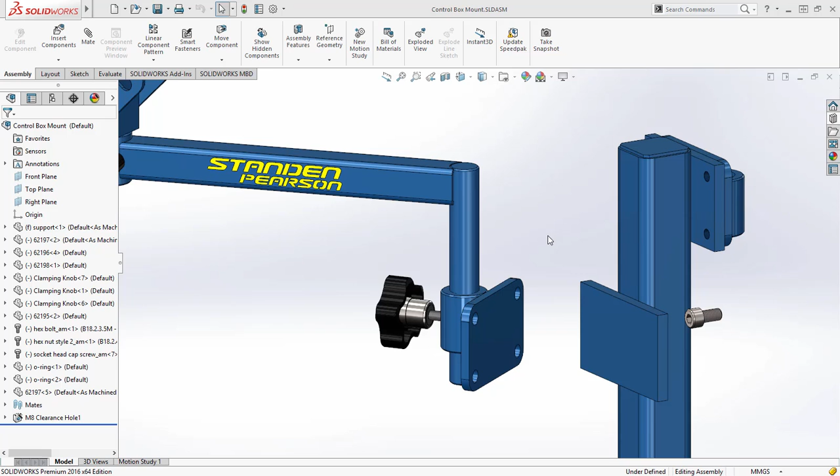First, the Profile Center Mate introduced in SOLIDWORKS 2015 has been added to the Quick Mates toolbar. All controls for this mate are available without having to access the Property Manager, including the lock rotation option for round selections. Also available is the Symmetric Mate when 3 selections are made, as well as the Width Mate when 4 faces are selected.

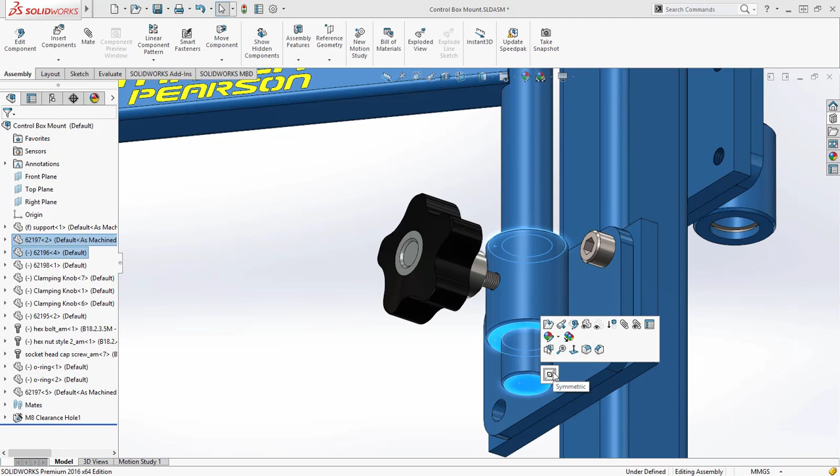If you remember, in SOLIDWORKS 2015 we introduced the ability to replace a lost mate reference that was used by multiple components. For instance, when this bracket was bored out, the face used for mating was removed, resulting in failed mates. After editing one of the mates to that part, you were prompted to repair all other mates to that face. Now, in SOLIDWORKS 2016, we extended this to include mates to a component that is used multiple times.

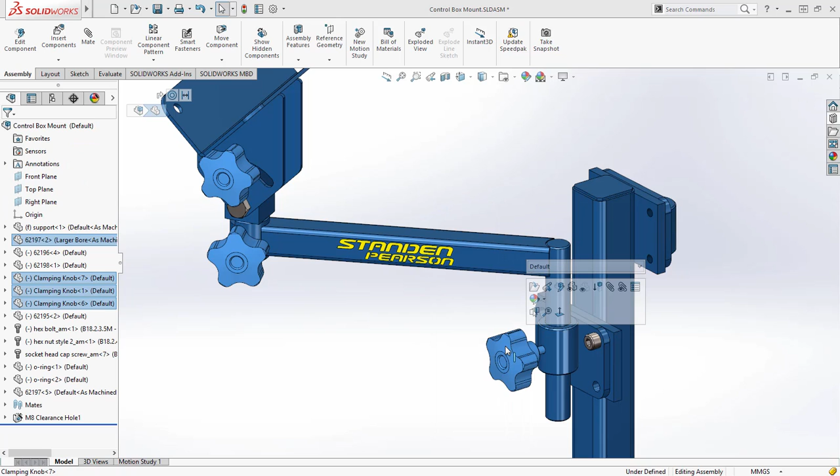Using the new selection tool to select identical components, you can see that we have 3 of these knobs in this assembly. If we change the configuration to a version of the knob with a new stud, we get errors in the tree because the face was not changed but replaced. Now I can edit the failed mate of just one of the components, and SOLIDWORKS gives me the option to replace all the missing references of the other components, a real time saver.

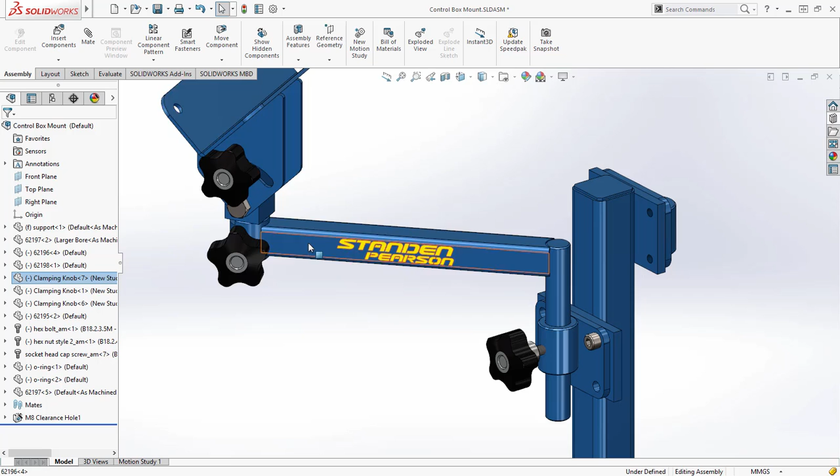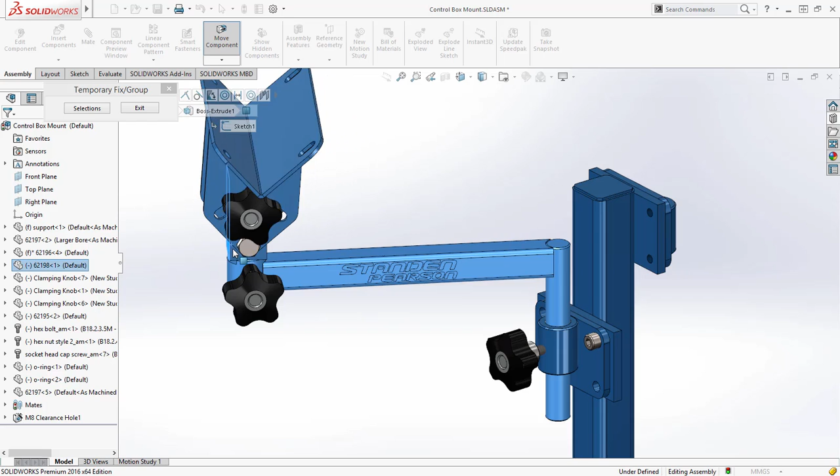When working with assemblies with many degrees of freedom, it can be challenging to position components without adding additional mates to lock parts down. In SOLIDWORKS 2015, we introduced a way to temporarily fix and group components to reduce degrees of freedom when using the Move Components command. For SOLIDWORKS 2016, we're making this tool much more accessible by placing it directly on the right mouse menu. Select the items that you want to fix or group, and this temporary mode behaves similar to the Isolate command.

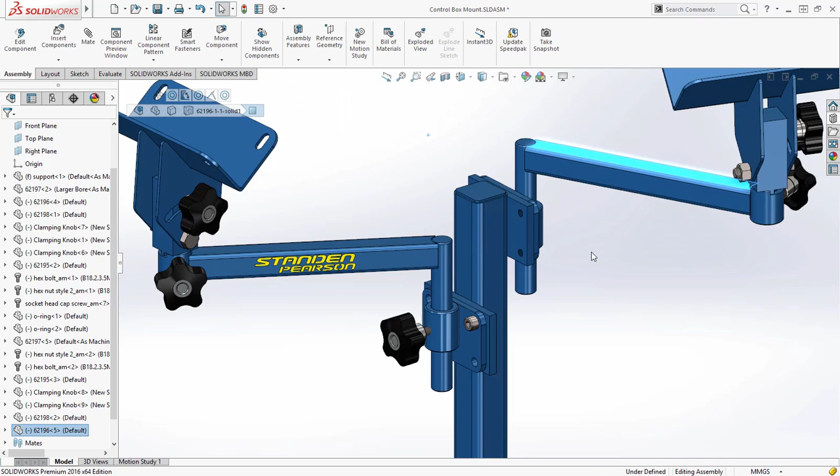In SOLIDWORKS 2016, you can now copy and paste multiple components at the same time, and any mates that exist between these components are copied as well. Previously, components had to be copied individually, and therefore mates had to be added manually. This can be done through the menus or with a simple Ctrl-C, Ctrl-V.

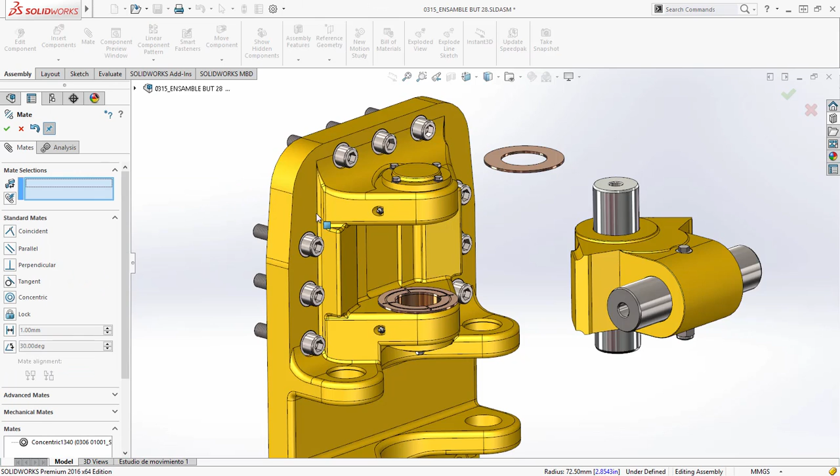When inserting a component, it's possible to select the desired configuration immediately, saving time by not having to change it after placing it. When using the Mate command, the first selection now changes its display to transparent, enabling you to see and select items that may be obscured by the first selection. For example, to mate these 2 cylindrical holes, it's much easier to select the internal component, and mating this thrust washer is much easier as well.

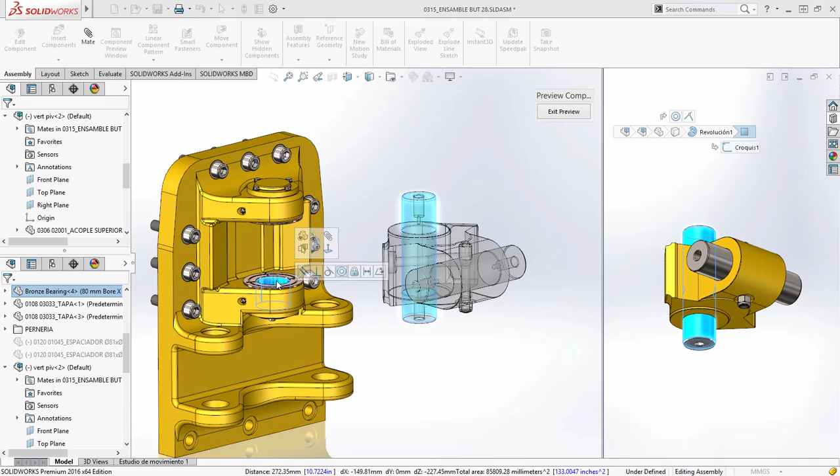Another commonly requested enhancement is the ability to show a component window while mating it. With the new Component Preview window, this is possible and can make adding mates much easier. Notice that the previewed component becomes transparent in the main window, allowing selections to be made easily.

Virtual components are a great way to store components internal to an assembly and minimize files on disk. Now, when making a subassembly virtual, you have an additional option to make the subassembly and all of its child components virtual in one step. This can be a real time saver.

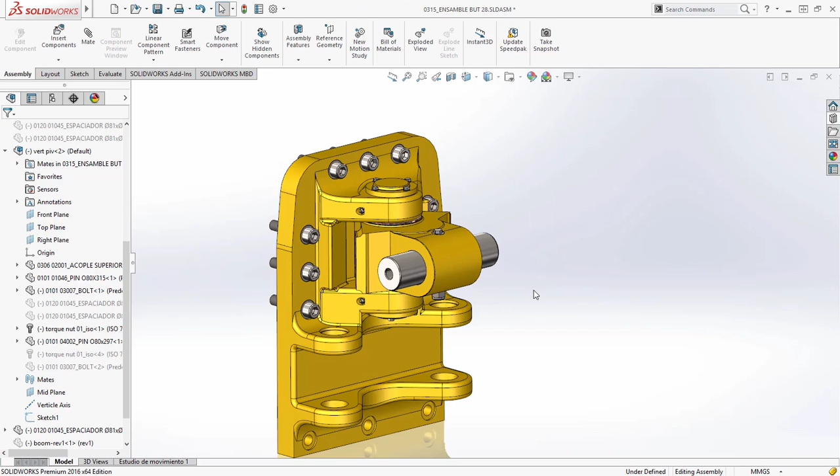When renaming a component in the assembly, it's no longer necessary to open it in its own window. It can now be done directly from the Feature Manager. SOLIDWORKS lets you know that this rename is temporary and will be permanent when the assembly gets saved.

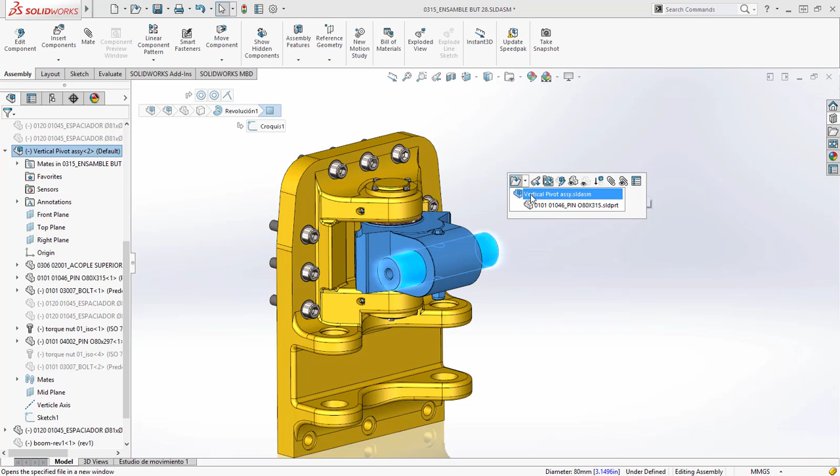Opening parts in their own window is just a right-click away, and now you have the option to access and directly open the part and the subassembly structure that it belongs to. Notice that this assembly has been renamed in its own window. When you hit the Save button, SOLIDWORKS allows you to simply execute the rename or access where-used information and update any references where this assembly may be used by searching through any folders that you choose.

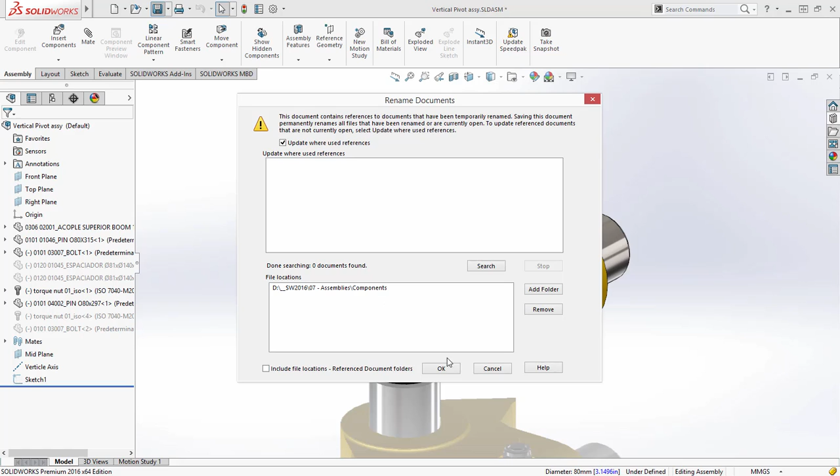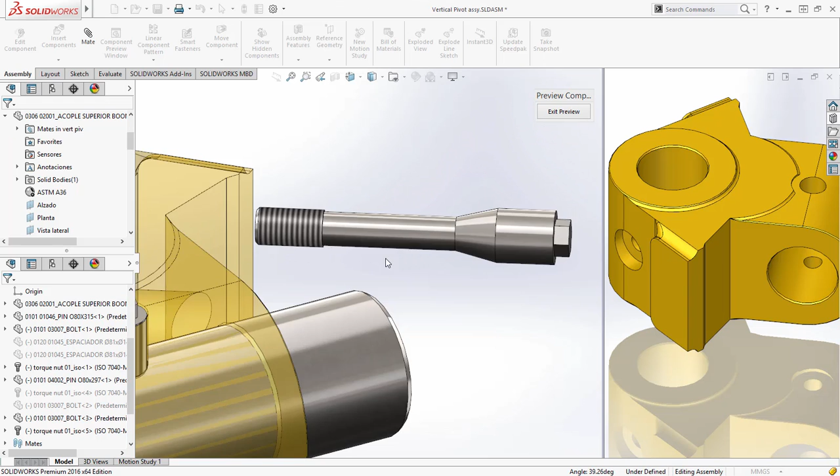The Component Preview window has many other beneficial uses. For instance, if we copy and paste these 2 parts using standard Windows hotkeys, we can use the Component Preview window to see internal areas of the model. Let's mate the nut to the pivot bracket, and since it is transparent, you are able to select through it and mate the conical face of the screw to the vertical pin, and you're done.

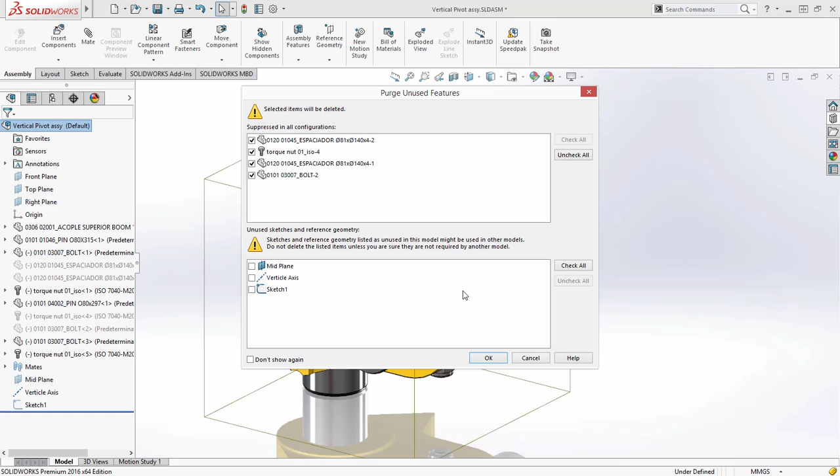A new command has been introduced for SOLIDWORKS 2016 that allows you to purge unused features in a model. Any parts that are suppressed in all configurations are listed, and any assembly features that are unused are listed as well. SOLIDWORKS warns you that these features may be used in other models and should be deleted with caution.

The same capability is available in part mode as well. Features that are suppressed in all configurations are listed, and any sketches and reference geometry are available to be removed if you're sure that they are not used elsewhere.

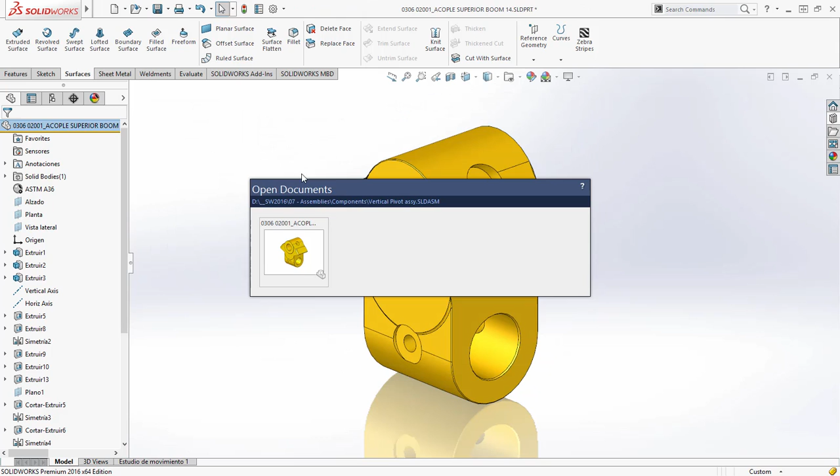Finally, when working with toolbox components, you now have a favorites folder to store the most commonly used items. Simply drag and drop them to the favorites folder and they are ready to use.

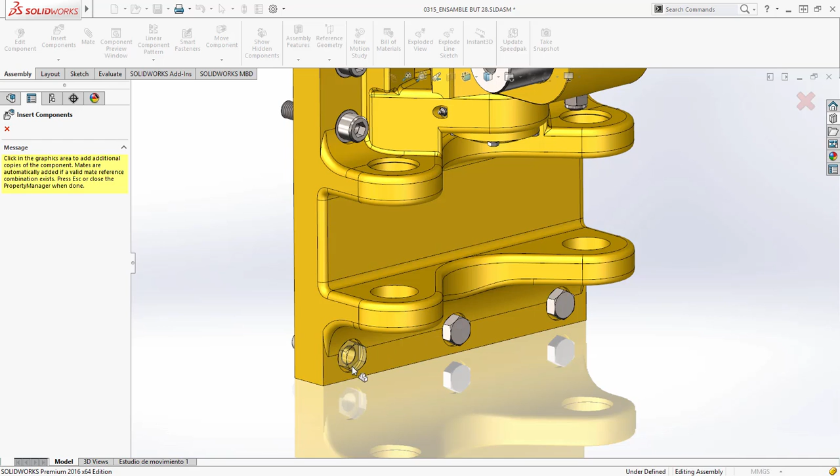A big time saver is that multiple toolbox components can now be edited in one go. Previously they had to be edited one at a time, which could lead to errors.

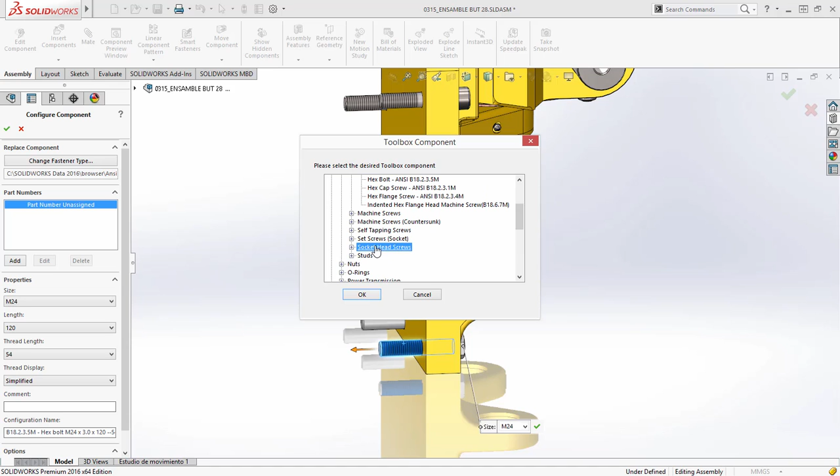Not only that, but you can now change the fastener type of toolbox components. You have access to the entire toolbox library. Just select the new type, then change the size and length, and SOLIDWORKS replaces the toolbox component. The mates can then quickly be repaired using the Replace Mate capability discussed earlier. Just replace the concentric and coincident mate of one of the components, and SOLIDWORKS takes care of cleaning up the mates to all the others.

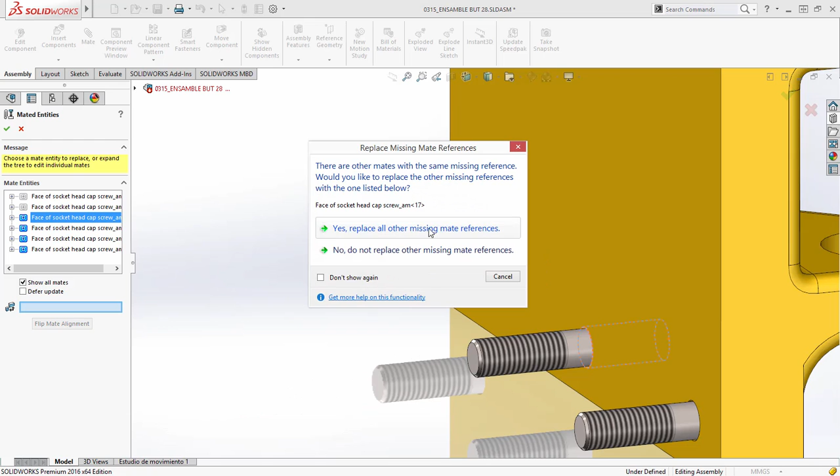With so many new enhancements in SOLIDWORKS 2016, your assembly productivity is sure to improve.